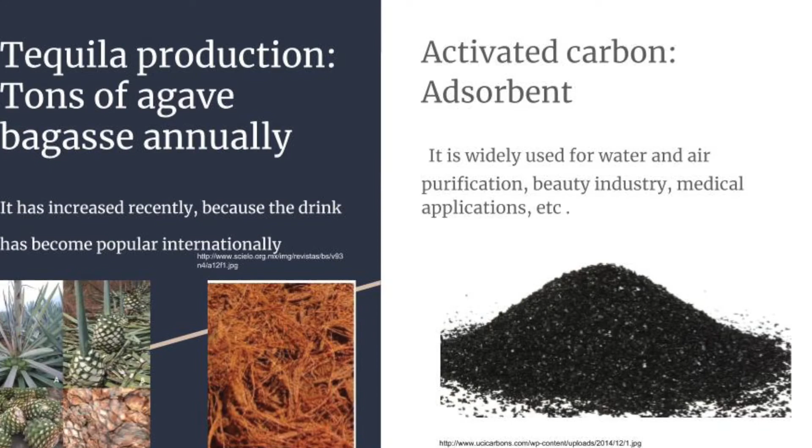On the other hand, activated carbon is used as an adsorbent, with multiple applications in the industry, such as purification of air and water and adsorbent of pollutants from both gas and liquid phases.

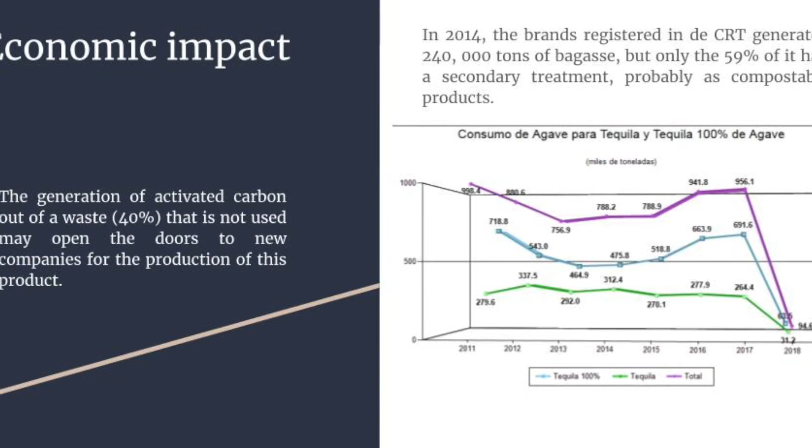The 40% weight of waste in tequila production corresponds to bagasse. For example, in 2014, 240,000 tons of bagasse were produced, but only 59% had a secondary treatment. The idea is to use that waste, which is cheap, to produce a very important product for the industry.

In this graph, we can see the agave required for tequila production. It has increased in recent years, and so has the bagasse waste.

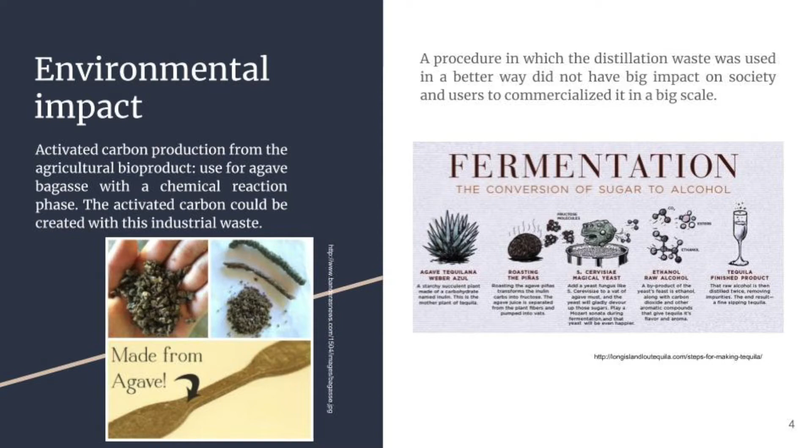In the Mexican production of tequila and mezcal, agave bagasse was created as a consequence of the distillation process. This implied an issue because, at the time, this material was only considered waste. Consequently, they resorted to burning this waste, creating a bigger environmental problem.

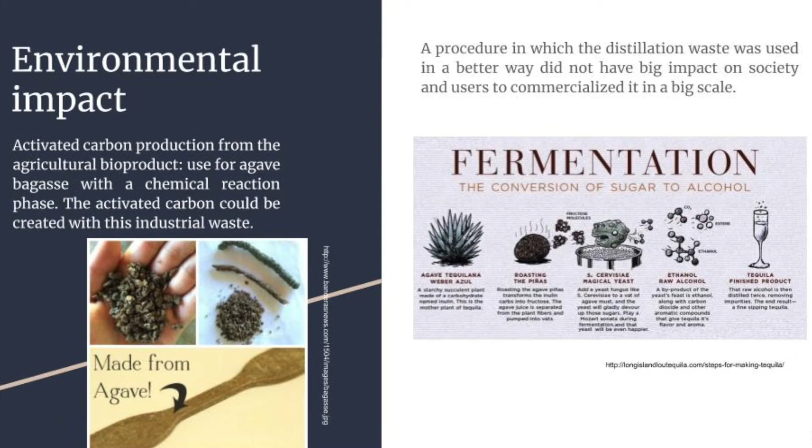Later on, they started a procedure in which this waste was used in a better way. Unfortunately, it did not have a big impact on society and users to commercialize it on a big scale.

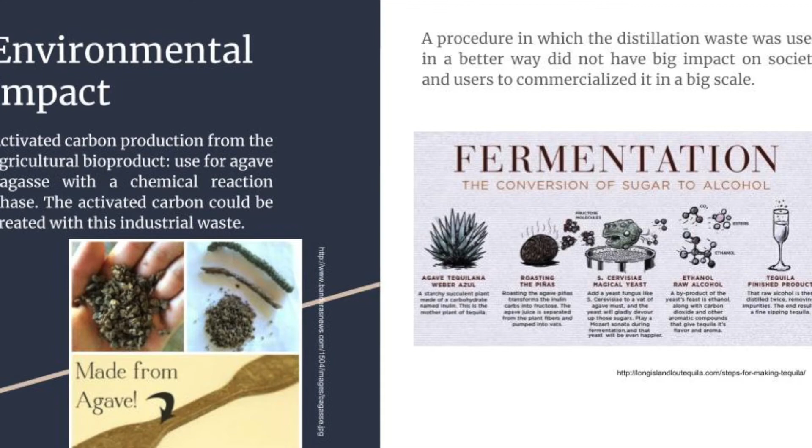As investigators around the world were looking for a new raw material in activated carbon production from agricultural byproducts, this research joined with the one of giving use to the agave bagasse from the distillation tequila and mezcal process.

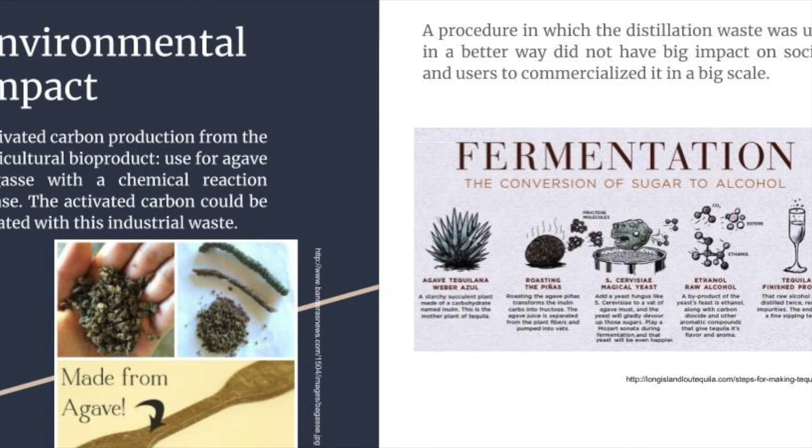With a chemical reaction phase, they found a way in which activated carbon could be created with the industrial waste of agave bagasse.

The first part of the process is to grind the agave bagasse. Afterwards, these fibers are blended with phosphoric acid in aqueous solution in a mixer, resting there 12 hours. The next step is a pyrolysis in an inert atmosphere, using nitrogen for this purpose.

The outlet is heated from 580 Celsius to 585 Celsius until the phosphoric acid is completely evaporated and separated from the mixture.

This new mixture is cooled down until 25 Celsius in order to control the substances easier. Two washes are suggested in order to clean the carbon and remove any rest of phosphoric acid.

First, from 1 to 3 washes with distilled water, and then a second wash with hydrochloric acid.

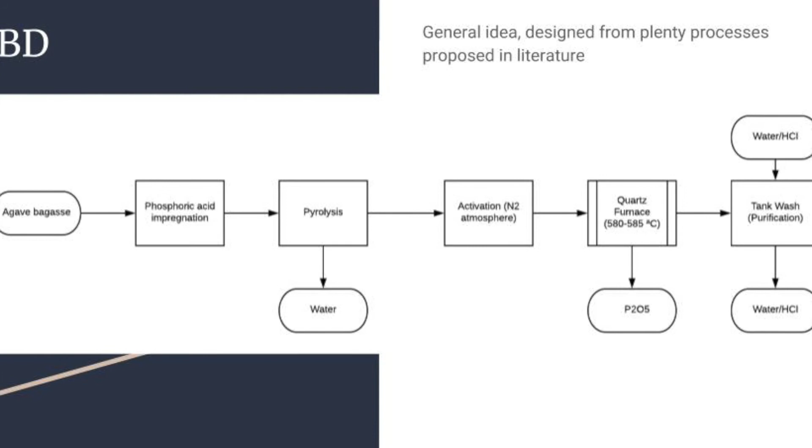For the BFD or the block diagram, we took information from several processes we found. If you are interested in consulting them, they are in our bibliography.

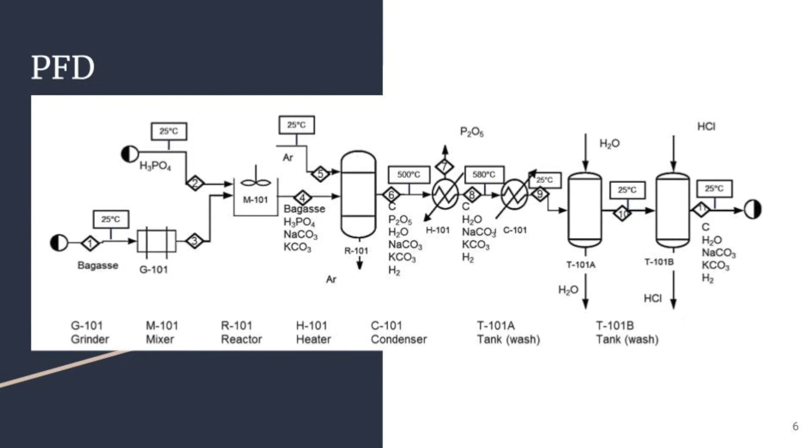And now, on the flow diagram, we focused only on one process from the ones mentioned before, and we also added the conditions we needed in order to make it work properly.

For the mass balance, we use the principle that states that everything that comes in comes out. For the energy balance, we use the heat of formation methodology, using the specific heat in order to calculate the sensible heat of every substance.

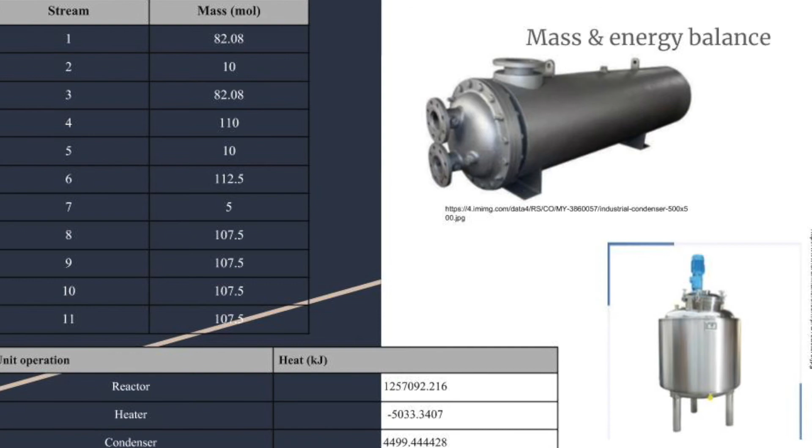We also use the heat of formation of every compound, the heat of vaporization for the latent heat in a phase change, and we define a different reference state for each unit operation. We use the energy balance to calculate the energetic requirements of our process.

For the calculations of energy and mass balance, we made the following assumptions: that the pyrolysis were achieved at 100%, that the bagasse is conformed by lignin, cellulose, hemicellulose, water, and ashes, that the ashes were solid and just heated, and that the process was made at 1 atmosphere.

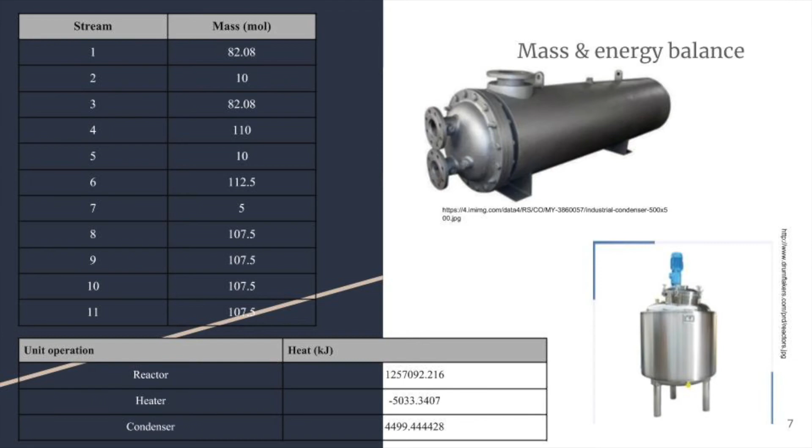The average salary for a recently graduated chemical engineer is around 7,000 to 9,000 pesos. Based on this salary, on transportation, internet, and food costs, and on how many hours a day and days we worked on this project throughout the semester, we calculated that we should sell this project for approximately 10,900 pesos. The hours we worked are described better on the Gantt diagram.

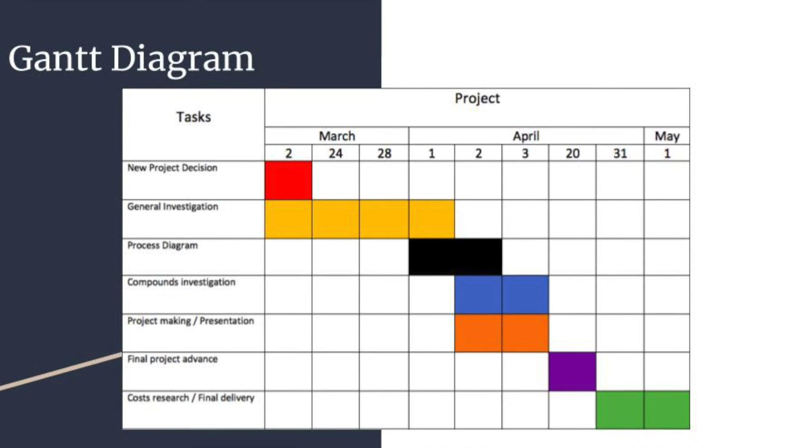The cost of the bagasse is between 8 and 100 US dollars per ton, and we use 3.7 tons per day or per process. The energy required for the reactor is to heat it up, for the heater is to heat, and for the condenser is to cool it down too. These three are electric, so we are considering only the electricity they need to work.

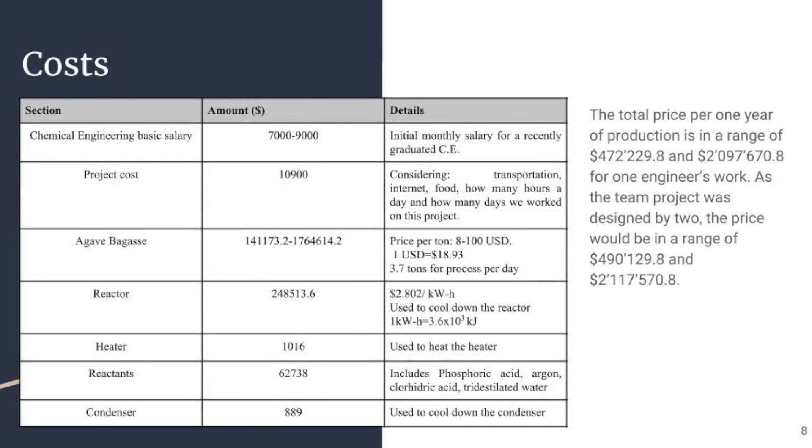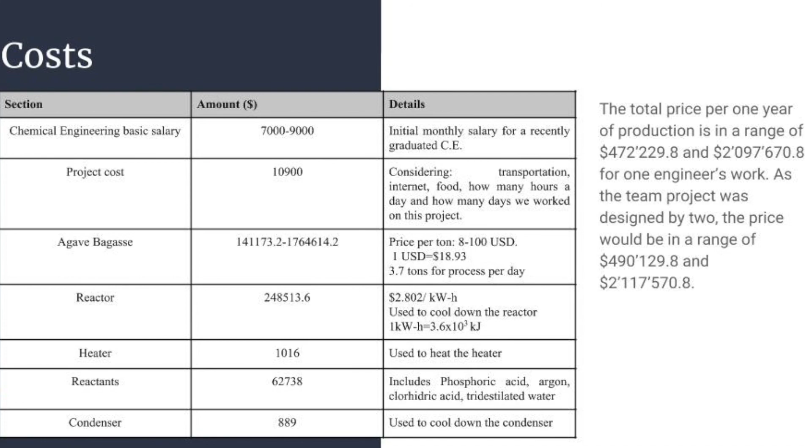The table shows the prices per year, considering that the process is made once a day and that there are 254 business days in a year. If needed, the process may be modified in order to duplicate or triplicate the production. It depends on the agave bagasse obtained, because the reactors are pretty simple to obtain and cheap.

As the process only produces 105 kilograms of carbon per year, we may think that it is a small project or of small dimensions, but we should take into account that the phosphorus pentoxide may be sold or reused in another process, and also the argon, water, and chlorhydric acid may be reused in this process or in another.

In order to improve our process, we suggest changing the phosphoric acid with an activator that is less pollutant, for example, the chlorhydric acid.

Also, the water used in the multiple washes may be recycled in some coolers, or filtered and reused in the washes. As the coolers considered in the process are electrical, it would be a good idea to either obtain the electric energy from renewable sources or change the electrical coolers for recirculation coolers.

In order to implement the past suggestion, in the heater, the regular fuels may be replaced with hydrogen combustion, in order to reduce the production of carbon monoxide, carbon dioxide, and other gases produced in the pyrolysis and combustion.

By a change of pressure, the extreme increase or decrease in temperature may be reduced. Therefore, they will be using less energy in heating up these procedures, and this means less money invested.

Recycling not only water, but other materials, can be key in order to find a way to get costs lower. If they can reuse the chemical components they are using, they could be utilizing them at maximum.

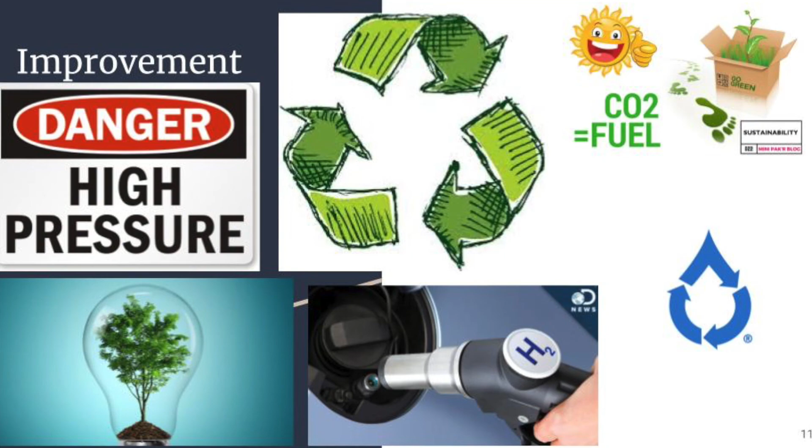Maybe not everything can be used in this particular process, but of course this is not the only process this company works on, so in previous processes this can be useful. For example, the phosphorus pentoxide can be sold or used in other procedures in the same plant.

These companies have to be updated on new technology coming out every day. Scientists are finding new ways in which companies can utilize wastage in a good way. For example, we are closer than in the past to getting carbon dioxide converted usefully into fuel.

It will indeed be expensive to invest in these new technologies, but in the long term it will help the company, and not only the company, but the planet. We see it as a necessary change, not only for this company and for this particular process, but for companies working with chemical components throughout the world.